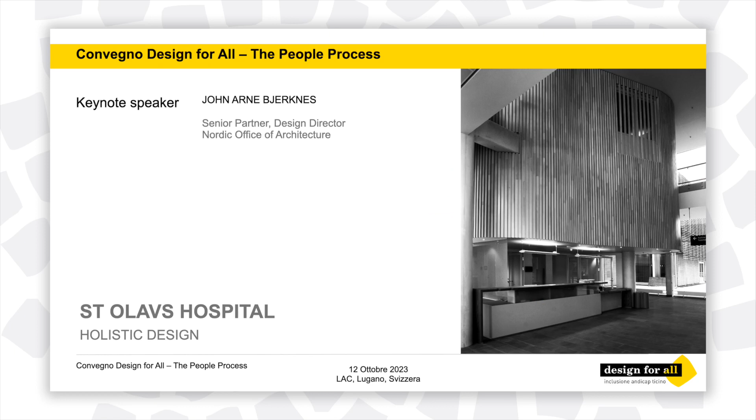It's like this. Our company, our office, is engaged with a great variety of big and smaller architectural projects. But beyond comparison, the hospitals are the most complex. So in order to deal with them, you have to find out how it is possible to make them as simple and understandable as possible. And we really believe in a

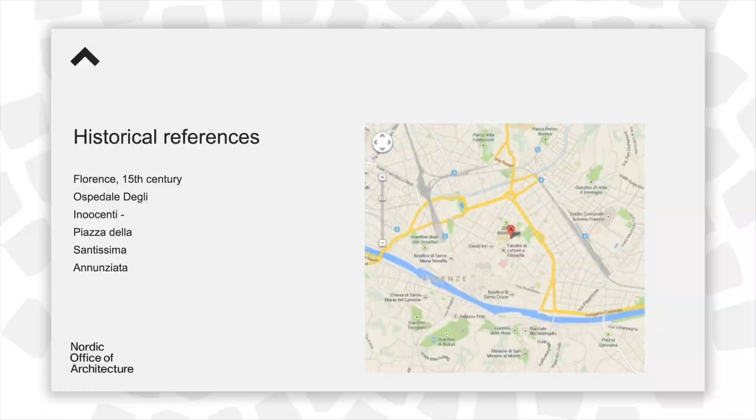holistic, inclusive approach. But how do we build our cities? We should build our cities around the squares, the streets, so people can meet, they can understand the structure, they can find their way easily, and they can orientate. There are some historical references.

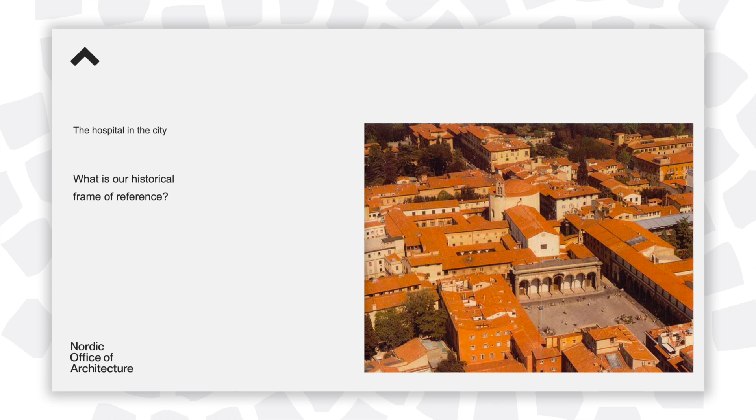And of course, when you build a city and you establish your squares and your streets, on the primary squares you should find also the primary functions. In Firenze, the first leper hospital was placed immediately in the middle of the city. Maybe not the smartest solution at that time, but still an easy way of getting to the hospital, which is a primary function of a modern society.

So at our project in Trondheim, we were lucky enough to find back to the historical roots, sort of. We tried different solutions for location of the hospital. But there was room and there was space inside the city texture and the city structure to build a huge complex, which a hospital is. So there you see the structure of the hospital inside the city texture. And a picture after this is under construction, not ready built.

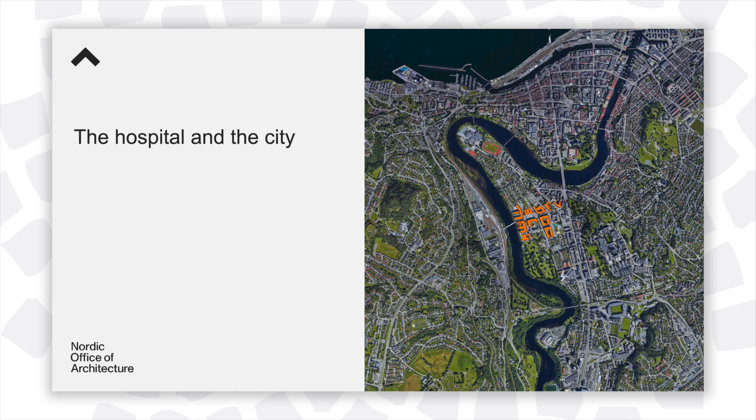I have to go one back. So this is a sign of making a hospital a part of the city pattern, a part of the city texture, taking care of the existing streets, the existing connections, making a new square in order to make it function.

An easily accessible central square serves as an entry point for all the clinics, all the centers you need to visit as a patient or visitor. You will find them from the central square, as you do in an ordinary old or new city. Getting to the square, orientate, go in, find your service, find your help. It should be that easy.

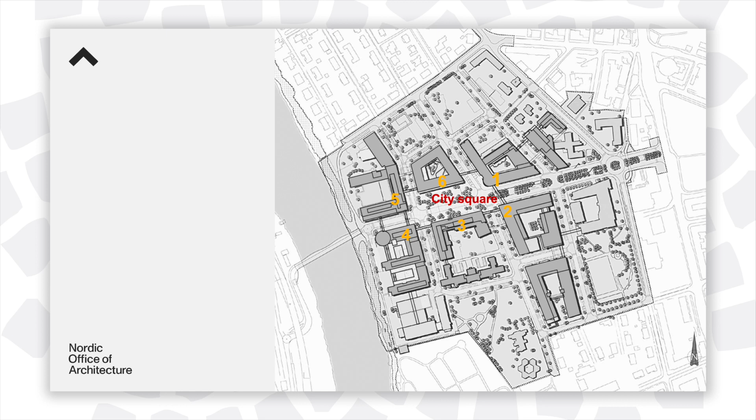At the time when we made this design, we were lucky enough also to benefit from a couple of medical ideas which were developing at the time. The one was the idea of the organ-based clinics, that you should treat one part of the body in one clinic. And the other was healing architecture, the need and the possibilities of using daylight, art, outside views, and this kind of design. And then when we started developing and designing the hospital, we were able to benefit from both these ideas.

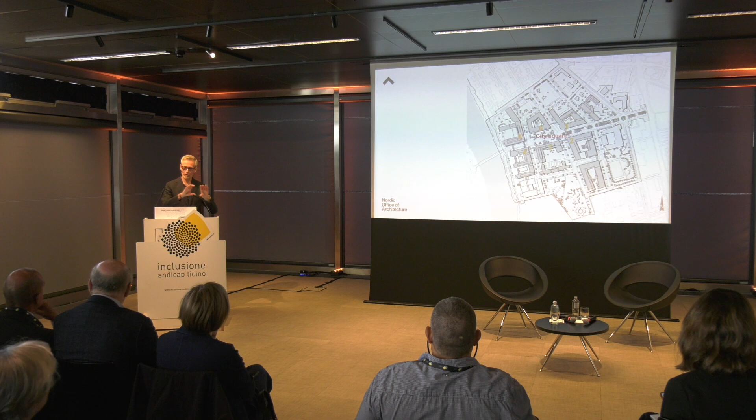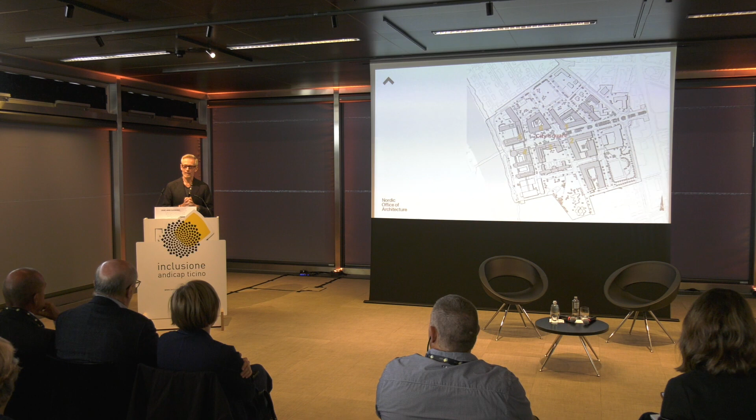The kind of hospitals you made in the 60s and the 70s, where you had a sort of production factory, the hospital factory. Down below, you treated people, and you made some towers to make them sleep and take a rest. But they were all gigantic megastructures and very, very complex to understand, maybe not possible.

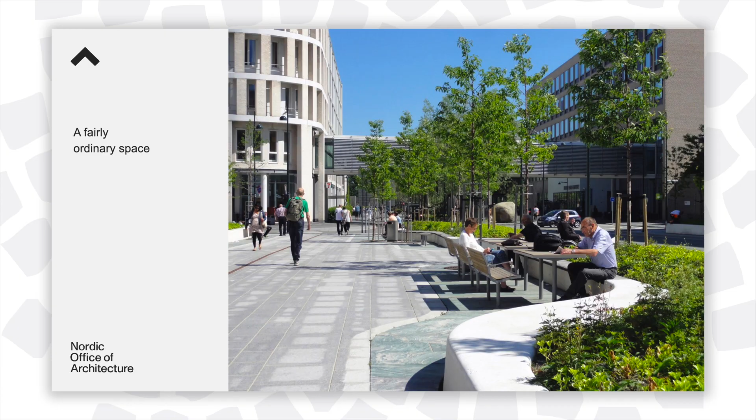This is a central square, which is meant to be a fairly ordinary space. Also for the houses, the house design has the same approach. Make them as ordinary as possible. Not an institution. It's a house in the city. You should recognize it, but it's still an ordinary house.

Scale is a part of it. Megastructures are megastructures, and they're mega big. So we try to keep each clinic in a reasonable size, which fits with the program. Maybe 20 to 30,000 square meters in each square, the length of an ordinary quarter in an ordinary city.

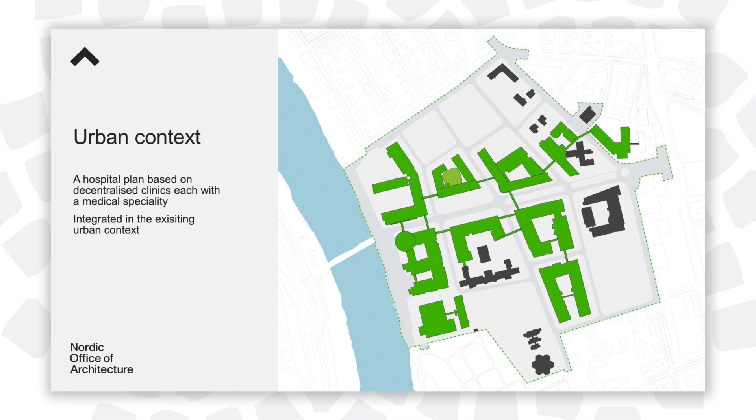And in order to win the competition, we used the existing structure of this part of the city to fit in, as I said, the different clinics. And each medical specialty had its own house. So then entering this inside city square, look around, there are 6 different clinics, 6 different entry points.

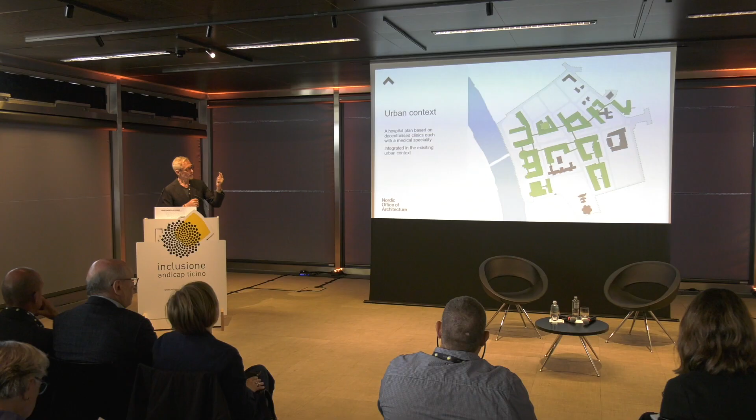But if you're unlucky and you don't hit your own entry point, you can go up to the first floor, and there's the circulation possibility, which is open also for the public. And all streets and all entry points of the hospital are open also for the public. And in each entry point, you find the serving possibility, a small cafeteria, which is also open for the public, and the orientation possibilities.

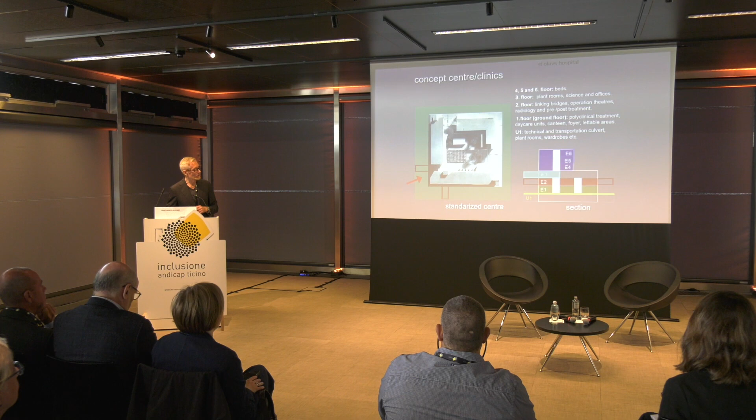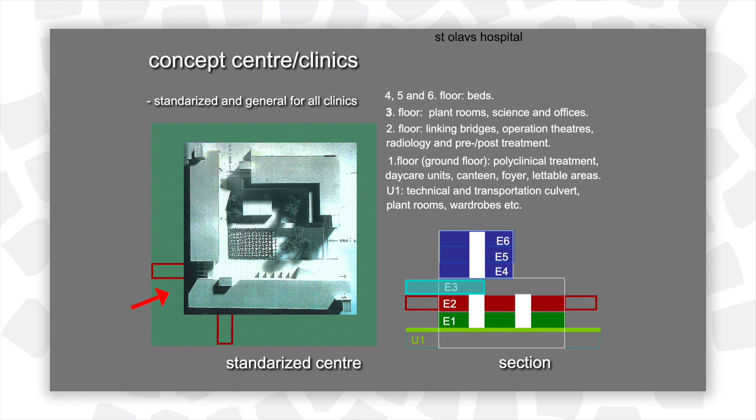Yeah, it comes in parts, this one. In order to make it understandable, we also made a normative quarter, and we made a normative section. Easy in, easy out. So all the daycare treatments are placed on the ground floor. Get in, get out, easy. You don't have to get into the structure, sort of.

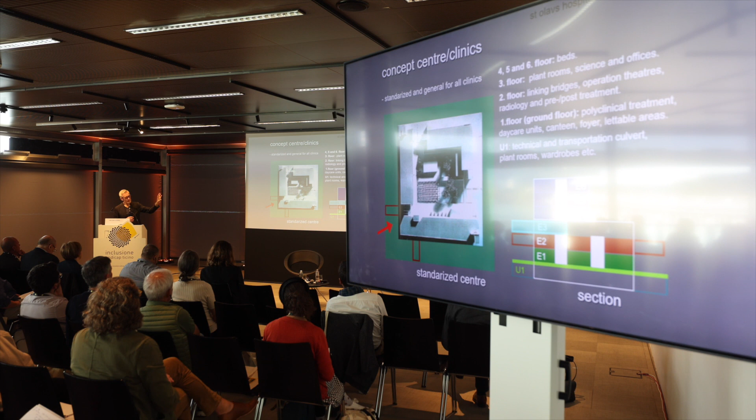And above you find the heavy treatment and the bed wards on top of that. But in each center, you find all the services needed for your illness or for your part of the body. You don't have to be treated as in a car factory, a part of a car sent to the next center. You go to your house and you find the needed service, the needed help in the clinic.

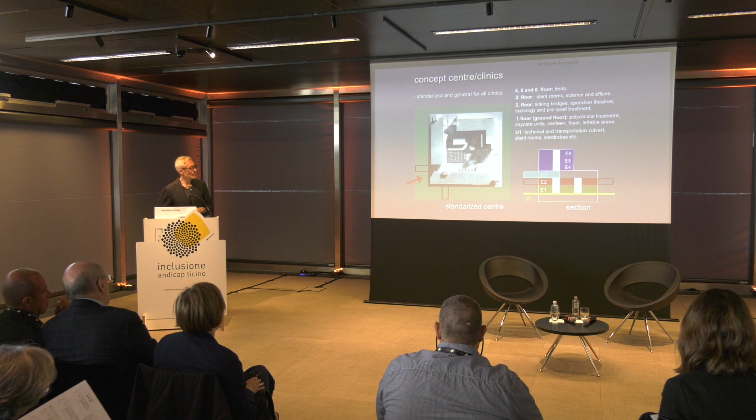And then the elements of healing architecture. The first part was the rational part, but this one is also evidence-based design. I mean, these are not just feelings. Feel that we need daylight, feel that we need to look out, feel that we need art, and this kind of challenge our senses. We know that this way of designing improves the healing process. It improves the health also of the staff. We can read it in the figures after the hospital finished building.

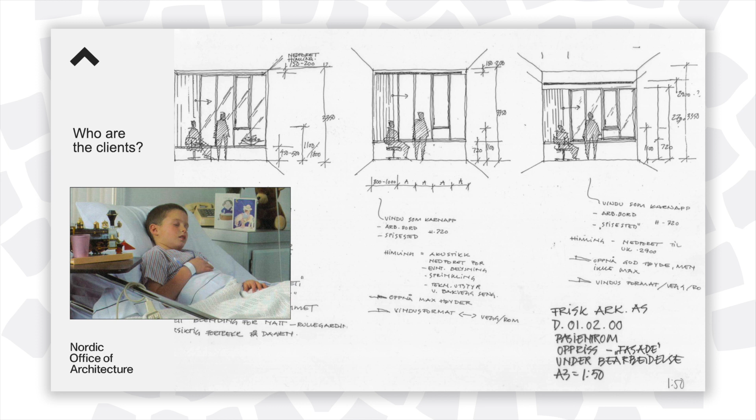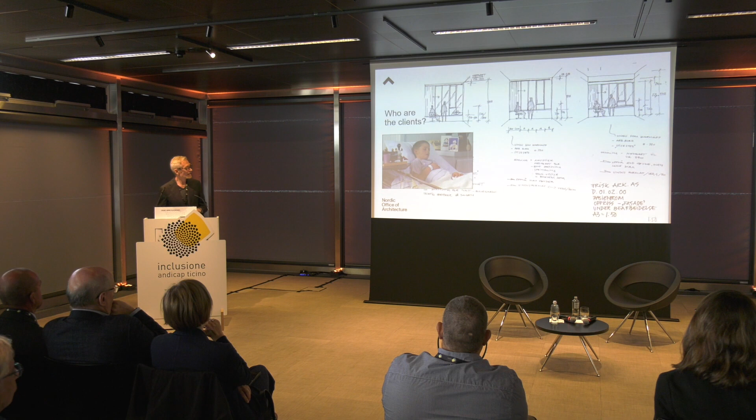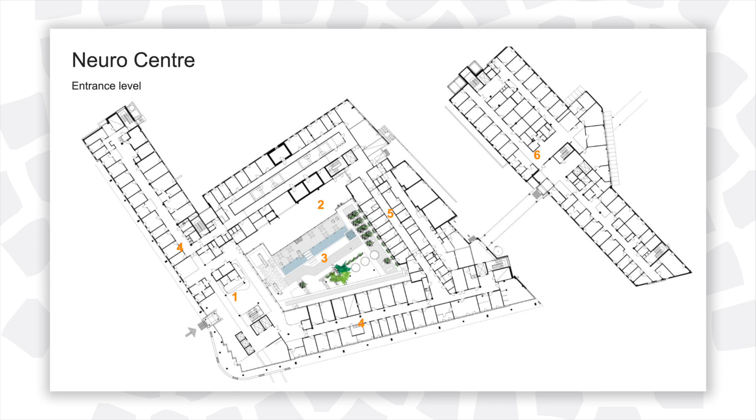And this is to show some of the sketches made for this discussion. How do you treat a patient? If this is the person you're taking care of, what do you do with the windows? Do you put them down, or do you put them up to 90 centimeters or 100 centimeters? Lying down, you don't see anything but the heaven. And also we're using architecture as a possibility of improving the environment. Using art for wayfinding, the big art program following the whole development of the complex.

And then, of course, after taking care of the bigger elements in the planning process, you also have to pay attention to all the 100,000 small details all through the process, and this is maybe the heaviest part of it, because then you have to follow every little decision in order to make them come out correct and designed. So we tried to have a board following this process all the way through, taking care of the big questions and principles, but also caring about the little ones. And for all the different functions throughout the hospital.

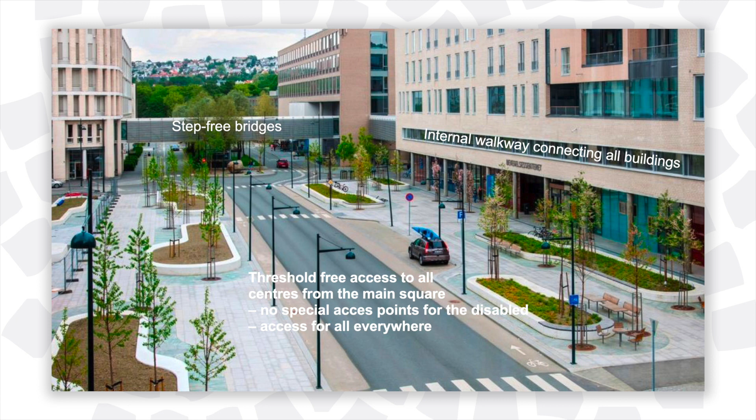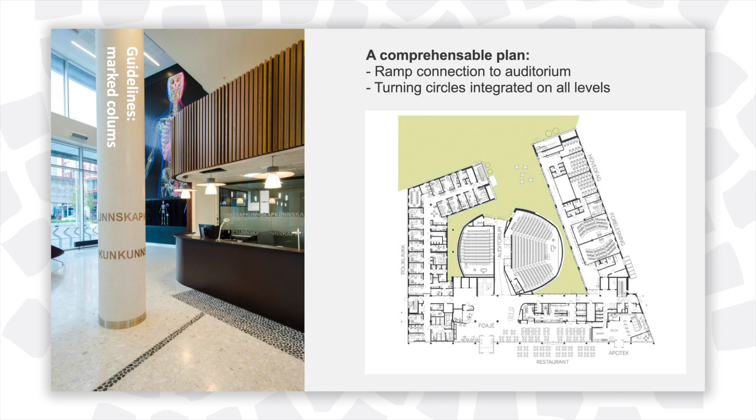This is inside the bed ward, and you see the central position of the staff. You have to have the usability of each little element throughout the hospital. Guidelines, trying to use natural materials as much as possible. You also see part of the art program. We tried to use colors as meaningful leading possibilities, inside and outside, linking all the different clinics. This was also a part of the artistic program, taking care of a whole center. A knowledge center, just as an example, with a ramp leading down to all the auditoriums. You have inclusive access to all levels throughout the hospital.

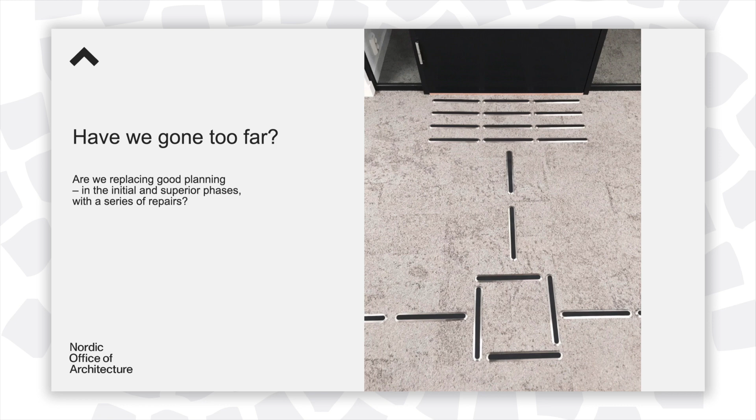And this kind of detailing. Still, after 15 years of development and project making, what did we learn when we get into a new project? If you don't hit the target in the overall conceptual design, you have to start repairing instead of getting into it in the correct position. All these little details are important. But the primary goal should be to take the big steps in the correct position when we start.